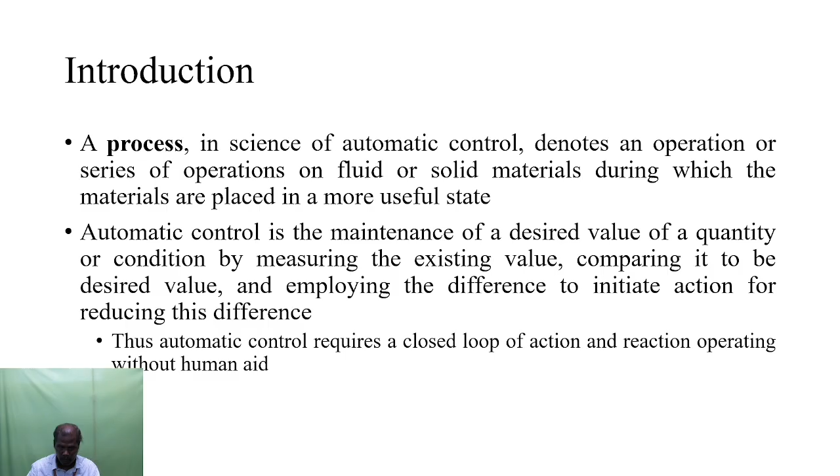Next I move on to the objective of process control. Here I am considering one plant. For that plant I am giving the raw material as input and I can get the product. So the plant receives the raw material, then uses the available sources of energy, and the plant produces the product in the most economical way.

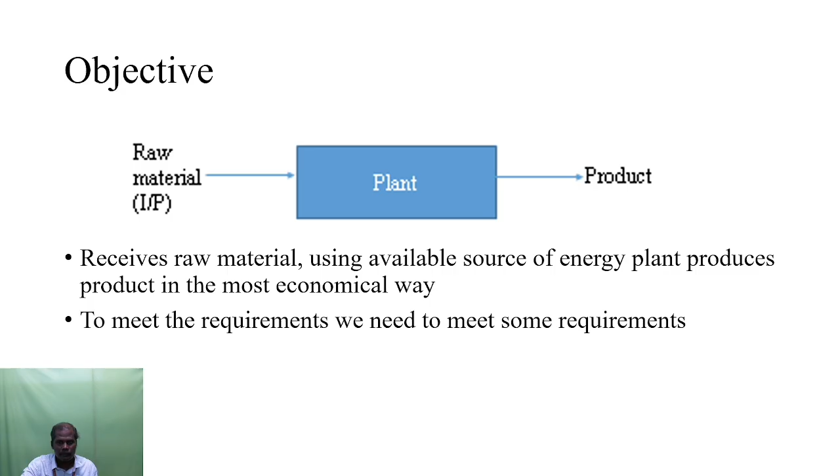I mean that the plant receives the energy from the raw material and produces the product in the most economical way. To do this, we need to meet some requirements. Process control requirements. Process control is essentially deciding how much the input must be changed to correct any deviation in the output from the desired value.

Requirements. The first and foremost requirement for process control is safety. Safety is very important. As far as safety is concerned, we need to concentrate on human safety, then instrument safety, then environmental safety. First one is human safety, next one is instrument safety, third one is environmental regulations.

For example, if I take a reactor in a chemical plant, the reactor must be operated at 100 psig. If we operate that reactor at a higher pressure, the reactor may burst, and this may lead to dangerous situations. To avoid that, we need to maintain the reactor at 100 psig. psig means pounds per square inch at gauge pressure.

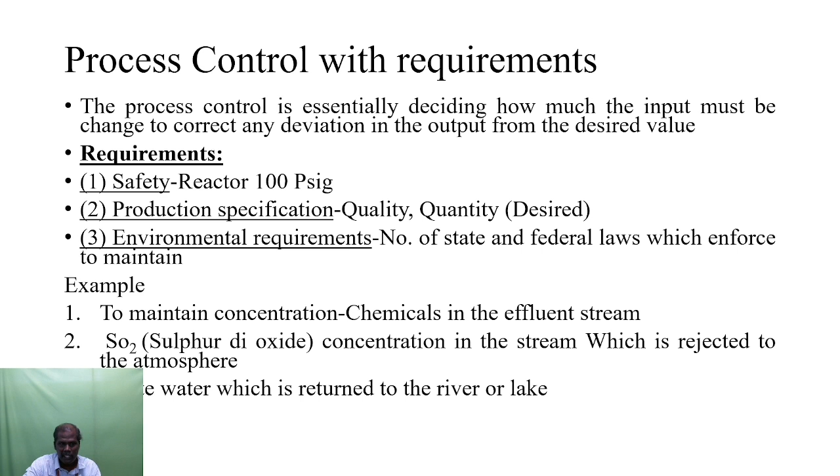Next I move on to the operational constraints. The plant has certain constraints inherent to it. These are the things involved in the chemical plant. The first one is the distillation column: the distillation column should not be flooded. Then if you are using tanks in the chemical plant, the tank should not overflow or go dry. Third one is the temperature in the catalytic reactor should not exceed the upper limit.

Suppose the temperature of the catalyst is increasing beyond the upper limit, at that time it will change its characteristics. At that time it won't be useful in the process industry. For avoiding that, we need to control the temperature of the catalyst.

Then the fifth one is economics. If you want to maximize the profit you are getting from the plant, you could reduce the cost. Reducing the cost and maximizing the profit is what people are generally expecting. These are all the requirements to meet the plant objective. To maintain all these requirements, some external intervention is required, and that external intervention is nothing but your control system.

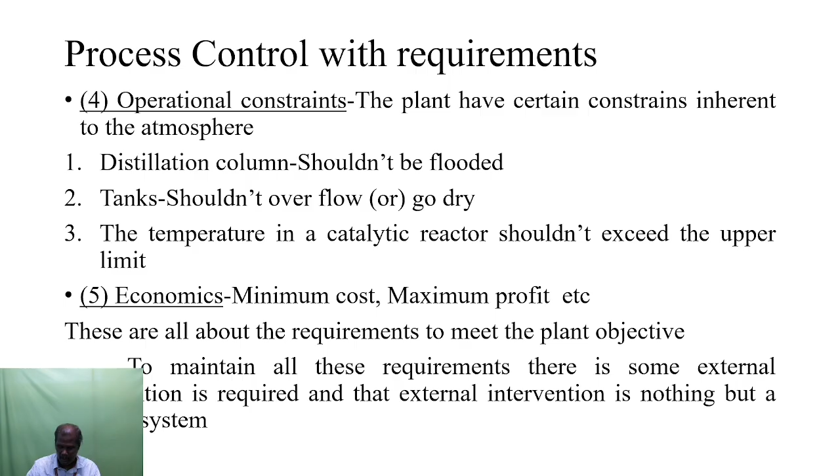Next, I move on to the heart of the topic: issues and need for process control system. First, let me discuss the issues. The first issue is the influence of external disturbances. Suppose you are using some temperature control process, a heating tank system, where you are heating the process. The incoming liquid comes from some place, and the outlet liquid leaves the process. The incoming liquid may be disturbed by so many causes.

The pump is used for pumping that liquid. The pump may not work properly due to aging of components. Otherwise, due to ambient conditions, the incoming liquid temperature may be changed. Like that, so many cases will be there in the process industry. Because of that, some external disturbance variables disturb the process. These are all external disturbances that occur in the process industries.

Then stability of a chemical process. Stability means the process will be operating in normal conditions. If you are disturbing the process because of some external disturbances, the process may get disturbed. After some time, the process must come to steady state conditions. That is nothing but your stable process. Suppose the process is not reaching the steady state value and the value is deviating from the set or desired value, at that time we can say that it is an unstable process. This kind of thing happens in the process industry.

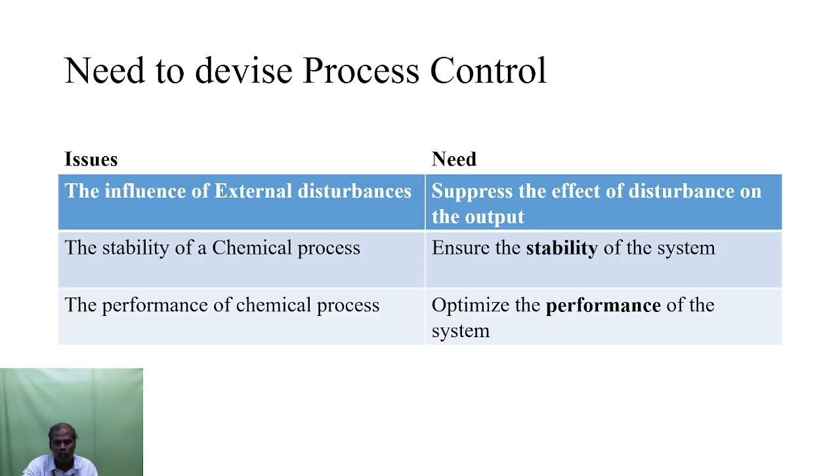First, I am taking the example of a heating tank system. This one is the heating tank where the incoming liquid comes with a flow rate of F suffix I and temperature of T suffix I. The outlet liquid leaves with flow rate F and temperature T. Here our objective is to control the temperature of the outlet liquid.

So once you decide to control or maintain the temperature of the outlet liquid, the foremost requirement is measurement, since without measurement we couldn't control anything. So for measuring this temperature, we need to use one temperature sensor. The temperature sensor may be a thermocouple, RTD or thermistor. Depending upon the requirements, we need to use that particular temperature sensor for measuring this temperature.

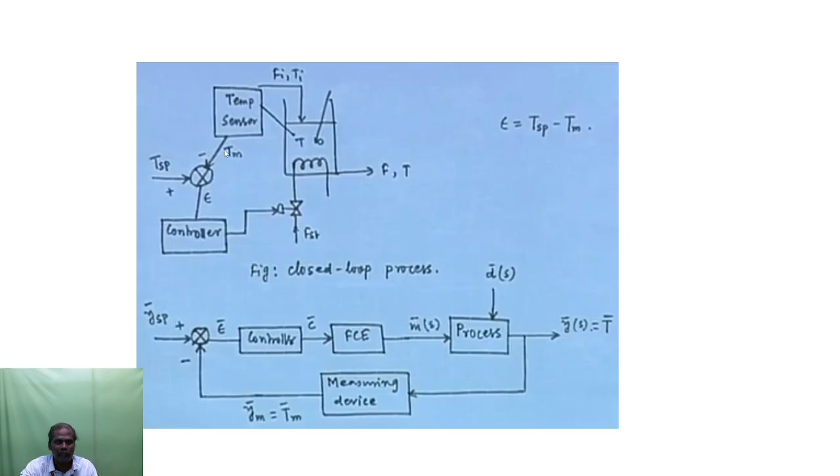After measuring the temperature of the liquid in the tank, the measured temperature value will be given to the summing point. To that summing point, we are giving the desired set point value. The measured value is compared with the set point value, and what you find is the error. Generally, the error is given as input to the controller. According to that error, the controller will estimate the control action, and the estimated control action will be implemented to the process through the control valve. The control valve is the final control element.

Here, depending upon the nature of the process, we need to use various types of controllers. It may be a proportional controller, proportional integral controller, or proportional integral derivative controller. Suppose you are using a single tank level control system, that time a P only controller is enough. Suppose you want to control a temperature process. A temperature process is generally a slow process, so at that time we need to use a PID controller.

Then in some places we are using a PI controller for very fast processes. Depending upon the nature of the process, we need to select the controller for effective control action. So according to that error, the controller will estimate the control action, and the estimated control action will be implemented to the process through the control valve. Here F suffix st is nothing but the manipulated variable.

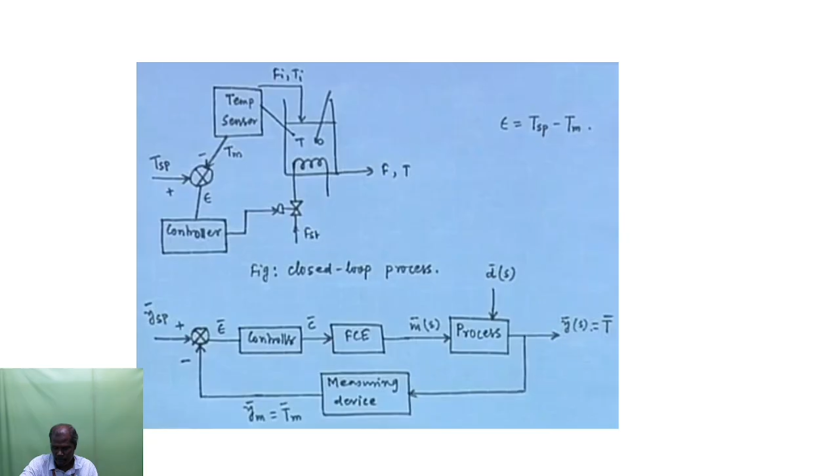Next, I move on to the external disturbance. The same example I am taking, with some more detailing. So this one is for the heating tank system. Through the spiral tube, I am admitting the steam. I just wanted to maintain the process at the desired temperature.

The outletting liquid temperature value will be T. That value will be maintained at the desired temperature value of T suffix D. Then I can control the level of liquid in the tank H at the desired value of H suffix D. After the startup procedure I am following, this will reach the steady state.

If there is no change of input variables, I mean the input variables Fi, Ti and steam flow rate, these values are not at all changing. Then the process remains at the steady state and there is no need of any control system. If the process inputs are not changing, the output is also not changing at the steady state. At that time, no need for a control system.

But this is not the case in practice. Okay. Now I am taking the error value. The error value E is equal to desired temperature minus the measured temperature T. I am going to analyze this process with two cases. First case is E is greater than 0. Second case is E less than 0. First case I am taking E is greater than 0.

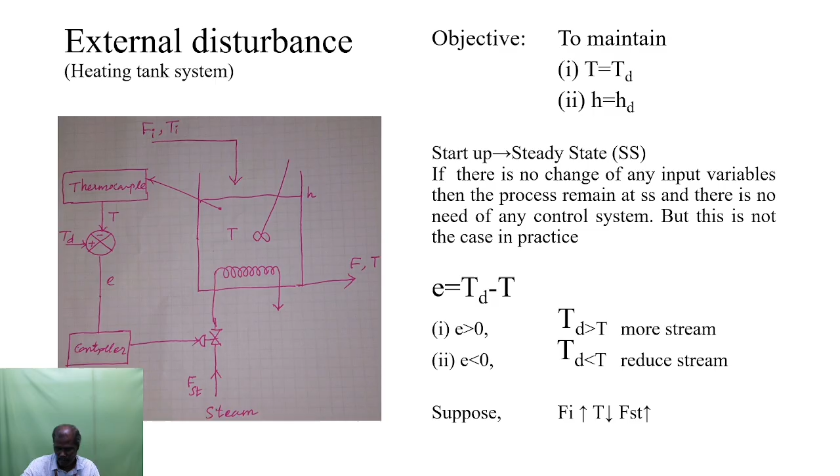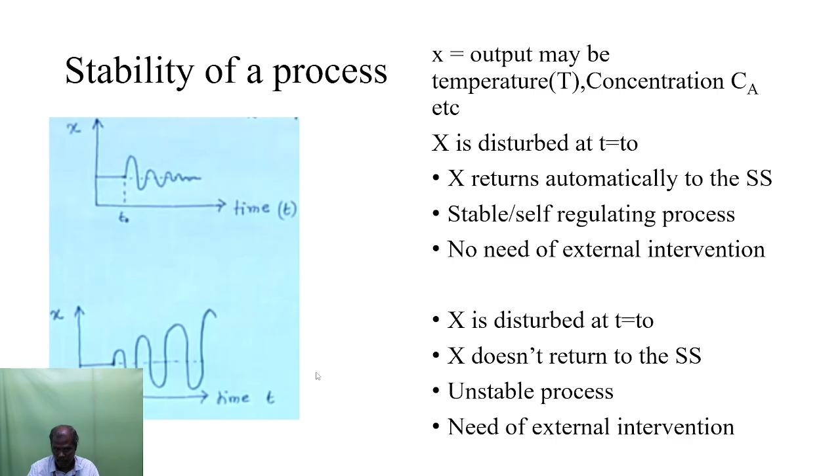How can we make the product in an economical way? We need to maximize the desired product and minimize the undesired product. Only then can you get the maximum profit. The economic objective is to maximize the profit, pi equal to the integral from 0 to t f of (b, a, c), where t is operational time, b is revenue from the sales of product, a is the cost of reactant, and c is the cost of coolant.